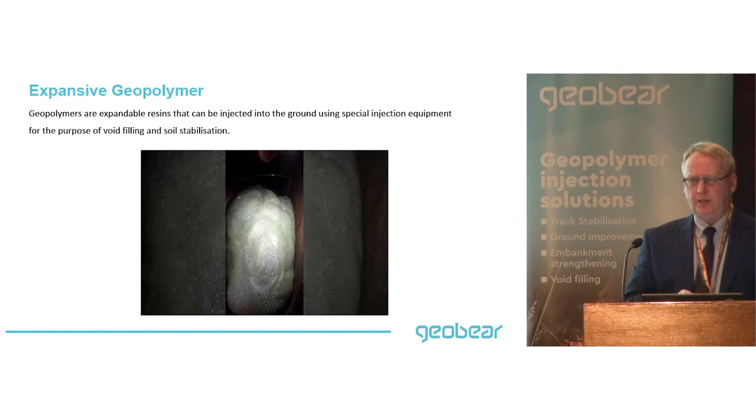So what are expansive geopolymers? They are two-component geopolymers comprising of a resin and a hardener. And when you mix them together, there's a chemical reaction, and that leads to a state change from liquid to solid. And there's a consequential volumetric increase due to that chemical reaction.

There's a short clip here I'm going to show you of us injecting a mixed liquid polymer into a void, and you can see the reaction as it moves forward. So the liquid's going in. After a few seconds, the chemical reaction will start. And it's finished.

So this polymer is a void-filled polymer, and so it's characterised by a fast chemical reaction, and it's low-density, high-volume, expansive geopolymer. We have a range of different polymers which have a different reaction profile, and we select the geopolymer for the problem that we're facing.

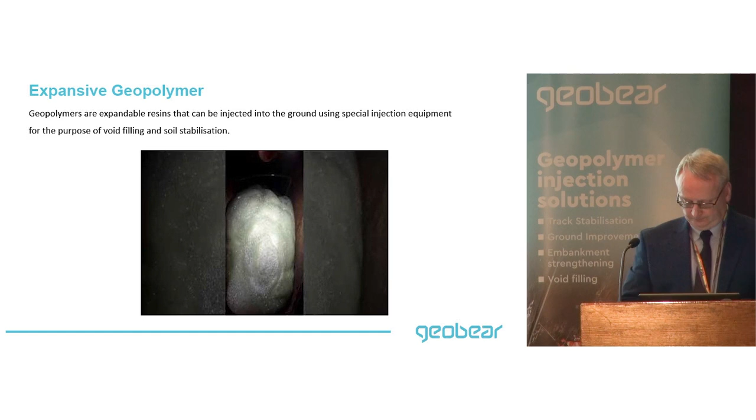We've passed around, there's two polymers here. One is a lightweight void-filled polymer. Another one is a high-strength ground reinforcement polymer. So they're two different polymers, and they've got quite different densities, although they're comprised of essentially the same material.

Now, depending on the geopolymer type, the geopolymers can expand up to 40 times their original volume and generate different lifting pressures. And what you saw in the video clip was a high expansive volume, and that was probably up to 40-fold volume expansion. But the amount that a polymer will actually expand is controlled by the confining pressure at the point at which you inject it. And so there's a relationship between the confining pressure and the amount of expansion you get.

And understanding that relationship is really important if you want to design with geopolymers.

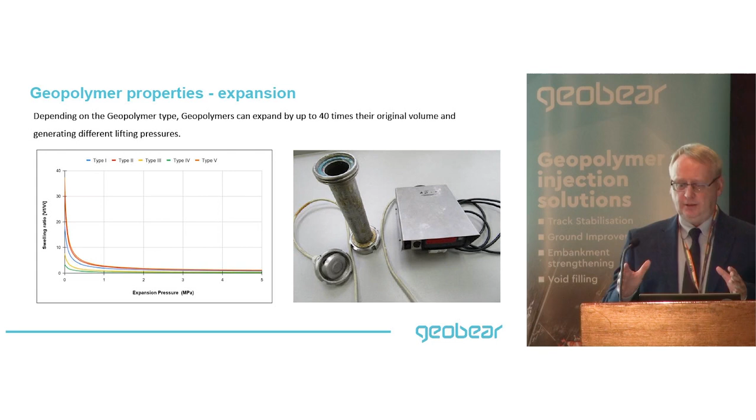So how strong is geopolymer? The strength is a function of the density. So as the density of the polymer increases, the compressive strength and the tensile strength both increase. And the two examples you've got out there, one is a low-density polymer, and one is a high-density polymer. They will both have different compressive strengths as a function of that density. What is also interesting to note is the compressive strength and the tensile strength are fairly similar at the same density, so it's not like a concrete which is strong in compression and weak in tension. These are strong in both directions, if you will.

And we test these material properties in the lab, so we know what the physical properties of the material is for any given density, and you can work out the relationship between density and strength. It's very important. You would expect the stiffness to go up as the density increases, so it's sort of proportional to the compressive strength, but the stiffness modulus increases proportionate with the density.

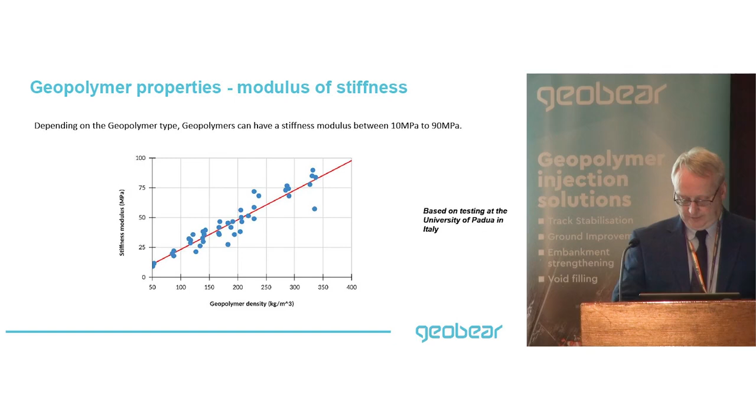So another thing with geopolymers is their ability to resist cyclical damage. The polymers have been tested to see what settlement you get under cyclical loading. And what we've found is that the performance of geopolymers at different densities will generally outperform normal, typical engineered fill, type 1, compacted fill. If you inject geopolymer into those materials, you'll find that their resistance to cyclical damage is greatly increased.

Other key properties: unlike conventional grout, geopolymers have a hardening time typically of less than a minute. You saw the reaction there went from liquid to solid in a matter of seconds. Full strength is normally achieved within 24 hours, and probably 90% of the strength within 1 hour. So they rapidly harden, quite different to conventional grouts.

Cement-based PFA grouts take quite a length of time to get to their compressive strength. So that's an advantage with geopolymers, in that we can do our treatment and get a result very quickly, and that saves time, which is important for completing projects quickly.

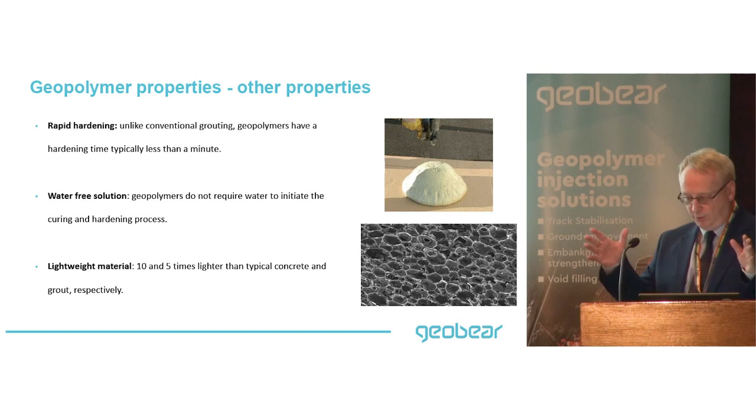The samples being passed around are very light. The actual density is less than 1,000 kilograms per cubic metre, so much less dense than water in most cases. They're lightweight materials due to the cellular structure, because essentially geopolymers are polyurethane-based chemistry. You can see the cylindrical bubbles here; inside them there's trapped carbon dioxide, which leads to expansion when you mix the two chemicals together. So they are lightweight, strong materials, very flexible.

We've had them tested extensively, because it's very important that injecting chemicals into the ground doesn't contaminate groundwater or generate a leachate problem. We've crushed the material into fine sand-sized particles and done leachate testing, and we've not detected any harmful chemicals above laboratory detection limits. So we're very confident they're safe to use over aquifers, and we've never had a problem reported regarding their impact on the environment. They're environmentally friendly products.

The other thing to consider is carbon footprint. Compared to traditional cement-based grouts, we use a lot less material to achieve the same end result, which generally means the carbon footprint of geopolymer-based solutions is lower than conventional solutions. We've had this independently verified by Carbon Footprint Limited, who've done carbon study analysis on our projects comparing our approach against conventional treatment. We're looking at roughly 46% less carbon emitted on typical rail-based infrastructure projects. It varies by project type, but for rail-based solutions it's roughly half the carbon emitted, which is a good positive thing for geopolymers, in my opinion.

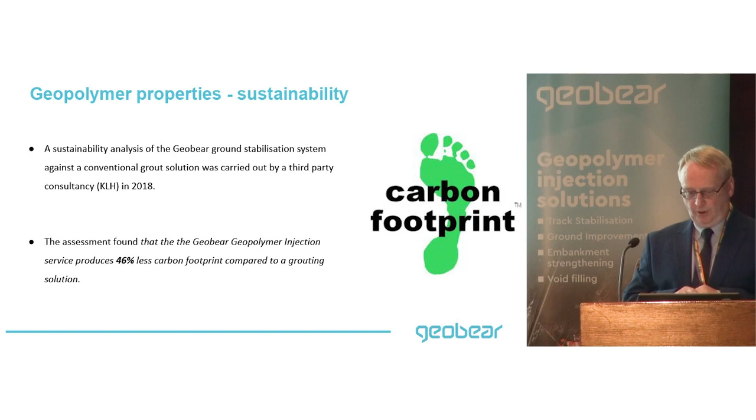So let's look at a few improvement principles.

The way you design with geopolymers depends on soil type: there's granular soil and cohesive soil, so clays and silts versus sands and gravels. The geopolymer behaves differently depending on what soil you've got, so it's important to know whether you're dealing with sands or clays. At the point of injection we drill a small hole, 15 to 16 millimetres, put an injection tube into the ground, and inject the polymer through that tube under pressure.

When you have a granular soil, like a gravel, the initial permeation is through the intergranular pore space, flooding the space between particles; that's called permeation. When dealing with a firm or stiff clay, typically for clay shrinkage solutions with a desiccated fissured clay, the polymer migrates along the fissures and voids rather than through the stiff clay itself, meaning less of what I call hydraulic fracturing.

But with a very soft clay, like we had at the Severn Valley Railway, injecting geopolymer under pressure will hydraulically fracture it. You create fractures, and into those fractures the geopolymer flows, then expands and hardens, reinforcing the clay soil through these fractures.

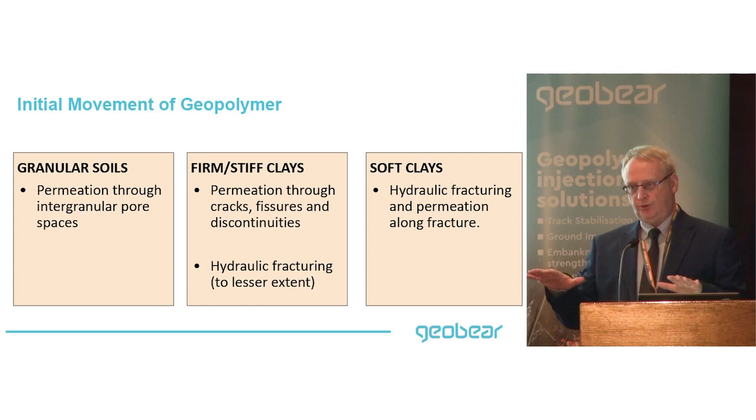That's shown in this picture—these are the vertical and horizontal fractures of geopolymer within a clay matrix. They typically form a cross pattern of interlocking fractures. Consider a very soft clay at maybe 10 to 15 kPa; inside it you put a geopolymer that could be 1,000 kPa in compressive strength. It's rather like putting steel into concrete—it's reinforcing the soil.

We fracture the clay, fill the fractures with the polymer, and because the polymer is very strong, you get a composite effect of strengthening the clay.

Here's some pictures from an excavation we did. This was actually done in stiff clay, and it showed how the polymer migrated along an open fracture. We dug it out of the ground, and it looks like this - an actual slab of polymer that's the same shape as the fracture it migrated along.

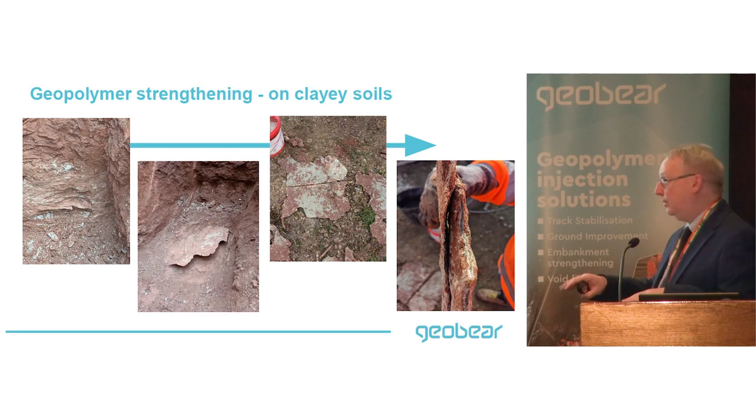So that's some fractures. Let me talk about equilibrium pressure, the science lesson bit. Key thing to know about polymers is the way they expand under pressure - the swelling pressure increases as the volumetric expansion gets smaller. So when you have a very large expanded volume, the pressure is very low, and conversely, when you have a small volume there's high pressure. This is the expansion phase of the geopolymer, represented in blue on this picture.

At atmospheric pressure, the polymer has its maximum volume, which is called free rise density. So if you were to inject the geopolymer on the ground here, it would expand. The only thing stopping expansion is the weight of the atmosphere on top of that polymer. That's the expansion of the actual geopolymer's free rise density. This is a key thing to know.

Now, when you inject in the soil it's working against that expansion force, represented by the red arrows. So you have a battle between the expanding polymer and the confining soil - two basic forces opposing each other. The point at which the polymer will stop expanding and harden is here, where the expansive force of the polymer is matched by the confining pressure of the soil.

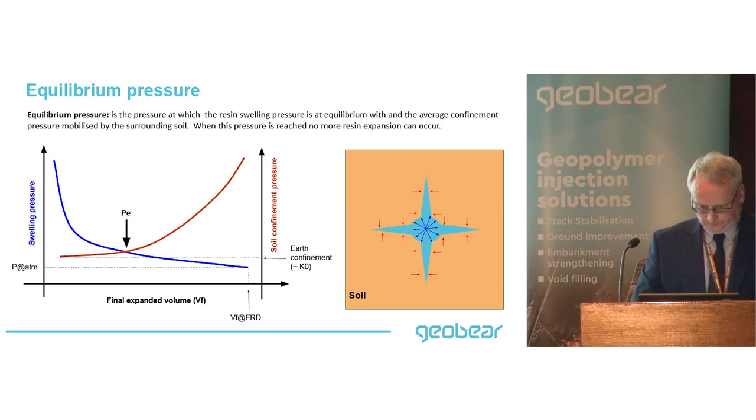Now, if I talk briefly about loose granular soil, here's an example of permeation. This was done down in the south of England, at a place called Hurst Castle. We did a trial on the beach where we excavated a trench full of beach shingle, loose gravel, and injected into that gravel to see what would happen. The polymer forms things we call bulbs - a big lump of gravel and polymer mixed together, because the polymer is in between the gravel, a bit like concrete. When you cut this stuff open, you can see polymer and gravel all mixed together. You get these large bulbs forming, and the size of the bulb is proportionate to how much you put in and the depth at which you inject it.

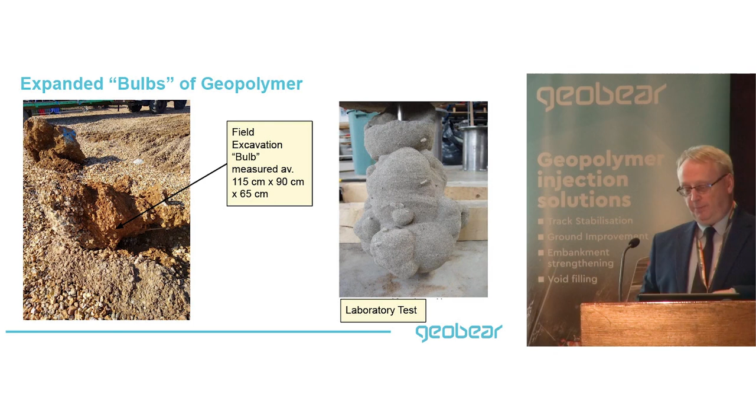Here's a smaller lab bulb done in one of these test cylinders using sand, a finer grain material, but essentially the same thing is happening. The polymer permeates through the pore space and then expands and forms this bulb, and it's that expansion that causes compaction. So in granular soil, we increase bearing capacity through compaction, not by creating fractures - quite different.

So the densification of the soil can be estimated from the volumetric expansion of these bulbs. If we can predict how big the bulb is going to be for the amount of kilos you're going to put in, we can work out how much the density of the soil is going to increase. That means how much the angle of friction is going to increase, and then how much the bearing capacity is going to increase. We have modelling tools that will calculate that improvement.

Final example, this is from a project in Glasgow. The red line here is in loose sand - you can see from 10 SPT down to about 5, so pretty loose sand. We injected at about 3 or 4 levels and did a post-treatment SPT test, measured in the blue line. We got a consistent improvement, which is very close to our model prediction for granular soil.

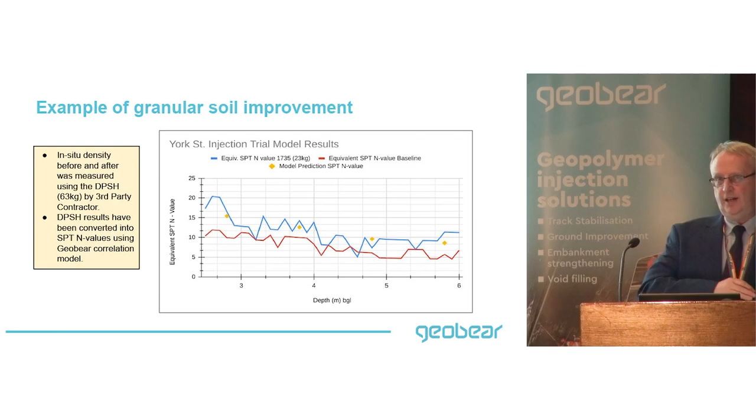So that's explaining to you how it works in clays and how it works in granular material. The next bit is to actually talk about the SVR trial, but I thought it was important to give you a bit of an understanding of how this might work in the soil, because what's happening in the soil is very important.

So as was mentioned, last year we were asked by Severn Valley Railway to assist them in stabilising a section of an embankment that had some problems - some slope stability problems, in fact long-standing issues on this particular slope. It's in a place called Alveley Wood in Shropshire, right next to the Severn Valley, and this is a heritage railway, as you probably know.

You can see from the picture the track was showing signs of distress, which resulted in a 300mm deviation from the design geometry. That meant they had to put a severe speed restriction on the line, 10 miles per hour. The amount of deformation was about an 80-metre section parallel to the River Severn that was showing instability, and so we were asked to look at this to help them stabilise parts of it using our technology.

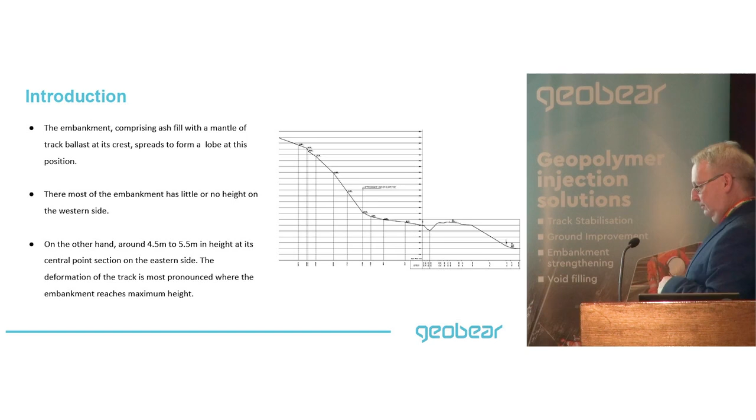So this embankment is not very big. You'd think why would such a small embankment have a problem? Because it's not a very high embankment - we're talking 4 to 5 metres maximum height. Other parts it's only a metre or so, not a very big embankment. But nonetheless, it's shown historic movement. The reason becomes clear when you drill boreholes into it.

Let's look at the track tilt sensors. Here's some tilt information on the actual track itself - these are the sensors.

We chose this location for the trial because we had some good data - we got some tilt data beforehand, so we can see what improvement we got afterwards. There was data available in 3 sections. They had some data, and the section that we chose to treat was 17684, which is shown by the red line. That's the tilt information for the section we were asked to trial, essentially the worst part of the embankment.

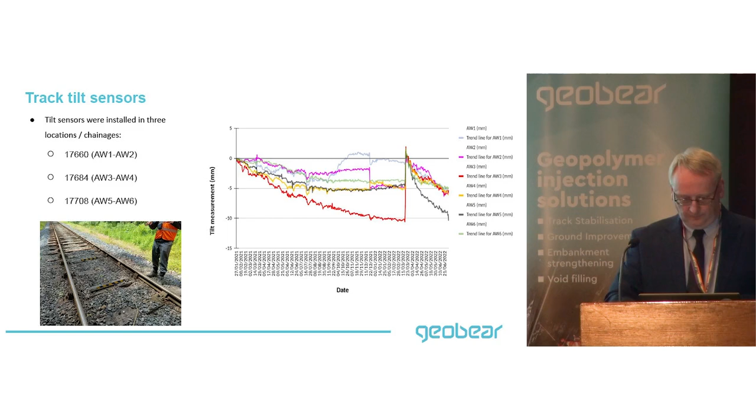This was interpreted by the ground investigation contractor as probably the result of an ancient landslide. This landslide probably occurred at the end of the last ice age, and so it generated a shear plane inside the top of the weathered mudstone, at a depth. This shear zone is about 4 or 5 metres below ground level.

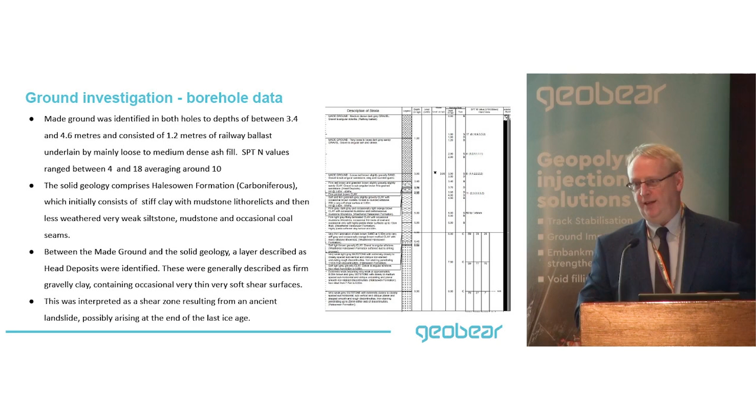Now, obviously, when they built the railway, they didn't know there was a shear zone there. This had obviously been there for thousands of years, and so they stuck the embankment on top of the shear zone, and then built the railway on top.

So when GIP did some slope stability analysis of this embankment, it was shown that the minimum factor of safety occurred when you have a shear surface through that shear zone. So essentially, all of this hill is sliding into the river along that weakened shear plane. We have a plane of very weak clay or soft clay, and the weight of the embankment is such that it's just slowly sliding down into the river. This is essentially the analysis that GIP did, which was indicating what the problem was. So it was a slope stability problem.

And in order to make the slope model work, you have to assume that the shear zone is at what we call residual shear strength. I mean, very, very low shear strength, no effective cohesion, low angle of friction.

Now, the original proposal was to soil nail through the shear zone into Halesowen bedrock. So the idea was to drive soil nails through this direction into the Halesowen rock to try and reinforce across the shear zone. So that was the basic original solution. And so it was Geobear's task to think, well, what else could you do with this sort of problem? I'll lead that onto the design. I'm going to hand over to Mohammed, who will take you through the design side of it.

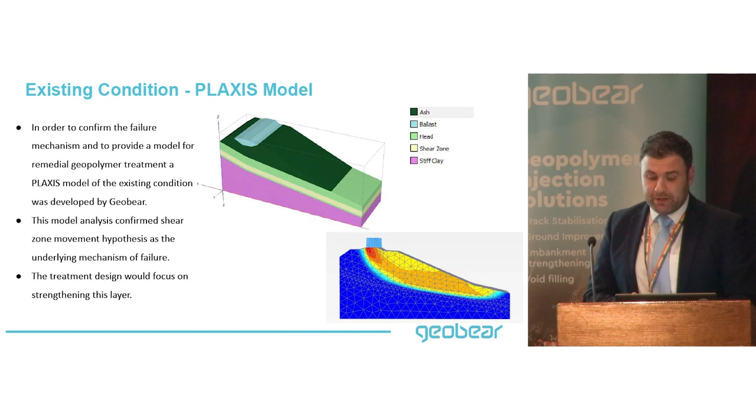Based on the analysis we carried out, we estimated that the factor of safety is somewhere between 0.8 to 0.9. We verified the geotechnical parameters that we had for the model, that we inputted into the model. And then we studied what amount of cohesion, or extra strength, we need to add to the embankment to get it to some level of stability. We estimated that we need to improve the cohesion of the shear zone from 0 all the way to 10 kPa. That was the main design parameter for us, the ultimate design parameter.

So in order for us to do that, we estimated that if we manage to improve the shear strength, the undrained shear strength of the plastic clay or the shear zone, to 100 kPa, we will be able to achieve that increase in cohesion of 10 kPa. So that's the design philosophy that we followed.

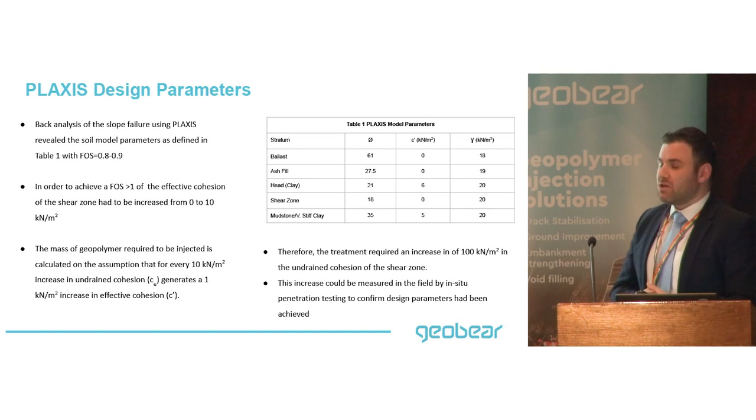So, based on all this analysis information, we carried out a detailed design, and we came up with this design. Some of you have attended the trials and seen this going into the ground live.

So what we've done, we've treated out of that 80-meter distressed section of the embankment, we've selected 10 meters within that, and basically installed the injections at every alternative sleeper bay, spaced roughly about a meter apart from each other. We extended the treatment outward, away from the track, towards the river.

We carried out the injections at different levels. Under the track, we treated basically the ash, and as we stepped away, we increased the injection intensity. We used a high density geopolymer to treat the shear surface and inject through it, with different materials and different injection dosages.

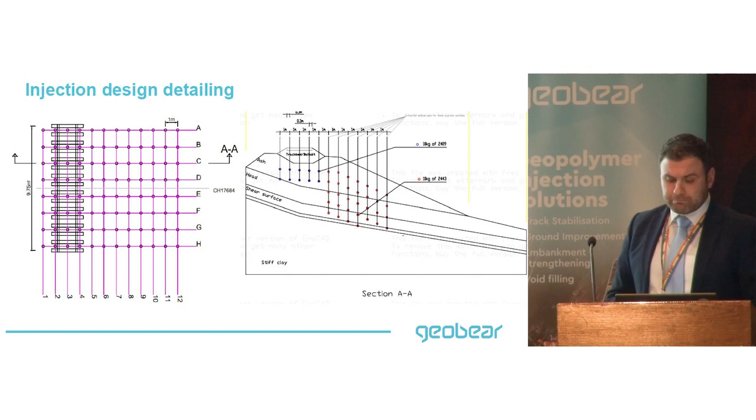We developed the design, and last year on the 25th and 26th of July, we carried out the installation using our mobile injection unit. Our mobile injection unit is mounted on a wagon connected to an engineering train, and it has all the equipment in-house within the unit.

Everything we need is within that unit, and the injection hoses are extended from the unit to the injection area. Our hoses can extend almost up to 120 meters away, so the injection unit can sit 120 meters away and the hoses just come up and inject.

You can see here the injection tubes already installed. These are 12 millimeter diameter tubes, installed to the design depth, and we go to every single tube, connect the injection gun, and start the injection.

We've installed approximately 136 injection tubes, and we've pumped roughly about 2.5 tons of material within that section.

During the injections, we monitored track heave, so we had laser level monitoring at different locations, monitoring if there were any movements being experienced on the track.

Following the completion of the injections, we carried out dynamic probing. Before we started, we did dynamic probing, and after we finished we also carried out dynamic probing, just to have a comparison of what happened instantly between before and after the injections.

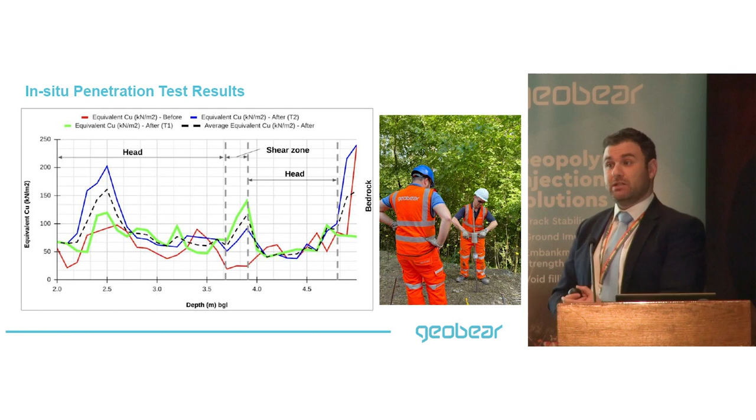Based on the information we obtained from the shear strength, we said, okay, we need to verify whether our initial assumptions with the modeling are correct or not. So we took all that data from the probing and plugged it into the model, using some of our in-house design models that quantify the improvements that Andy kindly described earlier, and we quantified what sort of level of improvement each material or each layer would exhibit.

So what happened to the ash, what happened to the head, and what happened to the shear zone. These are the highlighted parameters, the ones that actually been affected by the improvement, and that was quantified from the probing data. So we've taken that and carried out the analysis.

Based on the analysis, we've estimated that if this works, it should improve the factor of safety, pushing it from 0.8 all the way to around 1.2. So a significant improvement in the model and the factor of safety. Now remember, we were not working to a very rigid specification, we were not given a specific target, but this was done as a trial to understand if this technology is capable of improving the factor of safety and the long-term stability.

So the modeling backs up the theory that this should improve the overall stability. So what we've done, we've examined the data from the tilt sensors, and we focused on the middle part. Obviously, this is where we've done the treatment, so we focused on that.

We looked at 2 years worth of data, and looked at what happened in the last 6 months, but we also had to look at what happened before, because we needed a comparison, and we needed to make sure the comparison happens in a way that they're comparable, where the weather is roughly the same. We don't want to compare summer measurements with winter measurements, because that doesn't make sense, since water is a big factor in all of this. So we needed to make sure our comparisons are happening within similar seasons, and they're not very different.

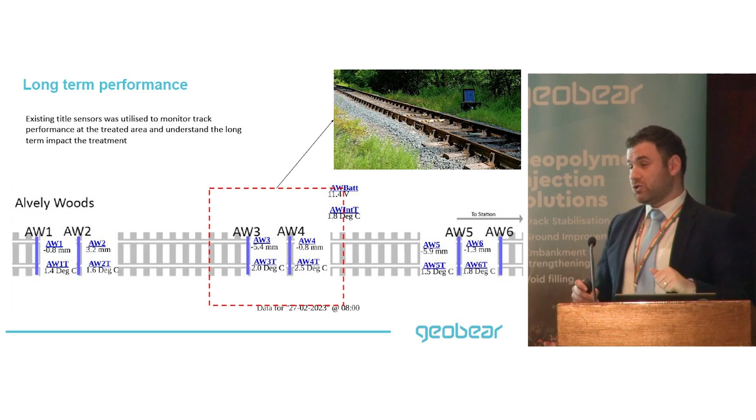So we've taken all that data and pre-processed it, and we also made sure we normalized the data for the starting tilt values, because it doesn't make sense to compare data with different starting tilt values on the track. The behavior would be completely different, so we had to normalize for that.

Based on this, we managed to generate these graphs from the processed data, and what it shows is that before the treatment, the rate of deterioration was around 1.75 millimeter a month. So every month we were losing that much, a movement or tilt movement by that amount. Following the treatment, we estimate this has gone down from 1.75 to around 0.4 millimeter a month.

And this was using 2.5 tons of material, which gave us this level of degradation. If we were to go with a full-blown design, we would have gone for 5 tons of material, and we actually modeled what would have happened. If we'd done that, we would have managed to reduce it to around 0.2 millimeter a month. So it's really dependent on what the client requirement is and what degradation levels you're after. We can probably come up with a design that would provide that target.

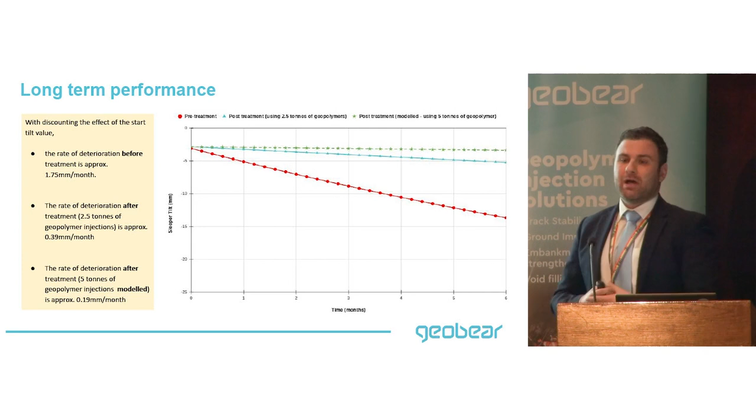So that's all good and interesting, but we also had another set of data to look at, not just the tilt sensors. Tilt sensors are installed on the track, and they're great to see how the track is behaving, but they're also affected by the track skeleton response, how the track is anchored to the ground, so there's an element of that data that will be affected by the anchorage of the actual track skeleton.

We looked at the inclinometer data. There was an inclinometer installed roughly 2-3 meters away from the actual treatment zone, just a few meters away, and we looked at that data to see if there's any observation we can make. The inclinometer sensors were installed right in the middle of the track, and if it moves one way, it's positive; if it moves the other way, it's negative.

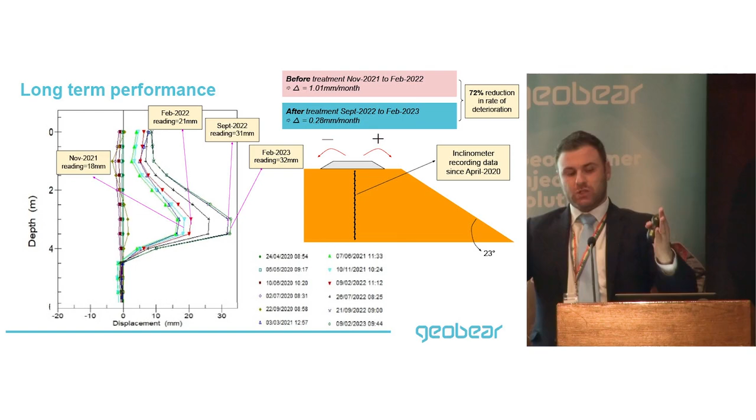They had different measurements roughly every 6 months, taking a set of readings at different depths. So if we just take a snapshot of the data and try to compare similar periods - remember, we did the work in July, around end of July - I picked a period between September and February to give the track time to settle and lock in position, then monitor it from September to February and see what happens.

So before the treatment, in November 2021, the inclinometer reading was about 18 millimeters. In February the following year, 2022, the inclinometer reading was about 21 millimeters.

That will give you a rate of deterioration of about 1 millimeter a month, roughly, if you take the delta between the two measurements and normalize them by the number of months. This is really quantified by this gap - how much movement has been exhibited between those two periods, in terms of how the core of the embankment has actually moved sideways towards the river. That's what this gap represents.

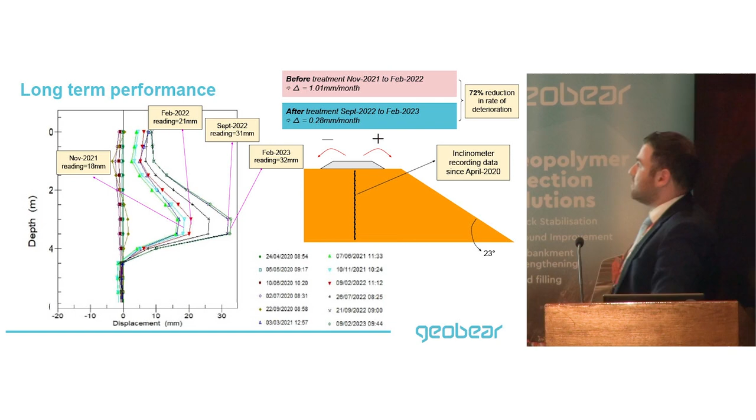Now let's do the same analysis, the same approach, after the treatment. Pick similar periods and do the analysis. If we look at September 2022, that was after the treatment - we've done the treatment somewhere in July, between those two dates. Picking September, because that's the most recent date we can use, the reading was 31 millimeters, and the following February was 32 millimeters. You can see this is the amount of movement exhibited within the core after the treatment - that gap. If you take the delta of that, it gives you around 0.3 millimeter a month of movement.

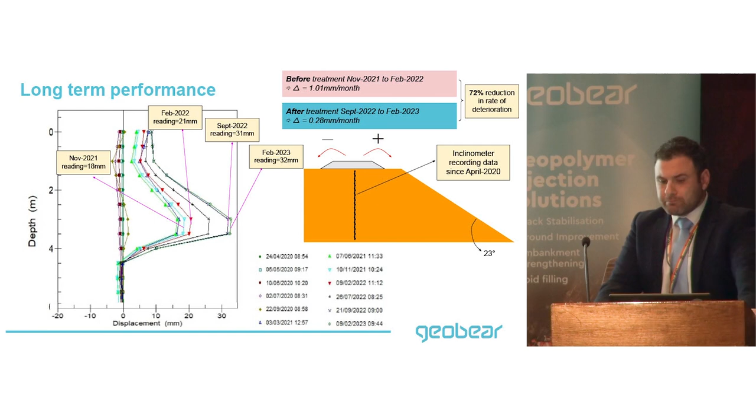Which translates to roughly 72% reduction in the rate of deterioration. And we were getting a similar percentage reduction in the tilt sensor, so that's basically making sense. It's matching up nicely with what you're seeing on the tilt data with the inclinometer data.

Now, one can argue, well, you've compared two periods, but maybe you had a drier season or a drier winter last year than this year - how do we know this improvement is actually due to the injections, not due to the weather pattern changing? Well, I've compared the rainfall data in those two periods in the same location. Before the treatment, between September 2021 and February 2022, the total cumulative rainfall within that period was around 342 millimeters.

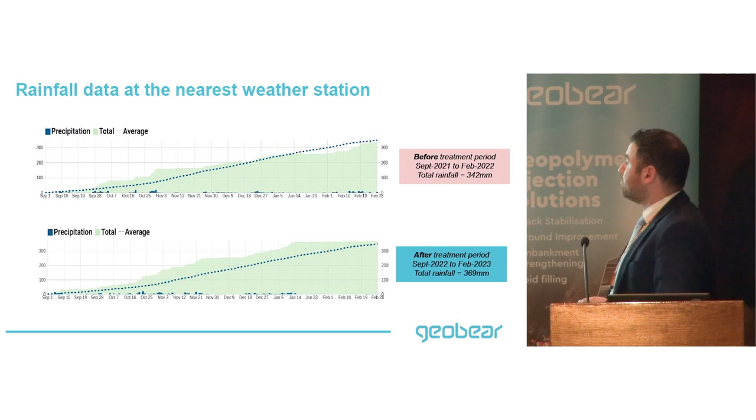And after the treatment, I've taken exactly the same period and compared the total cumulative rainfall, and it was actually higher - slightly rainier after the treatment. So that tells me water was not really a factor in why we were seeing this improvement. It wasn't because it was drier - actually it was slightly wetter than anything.

So what are our findings? The trial has demonstrated that geopolymer injections can be used to stabilize or reduce the rate of deterioration of slopes. Obviously, to what design specification or level you want to target is another discussion - we can design to different targets depending on what the client wants. Also, modeling was key in understanding the overall mechanism and developing the treatment.

The last thing we want to do is just come in and start injecting geopolymer randomly everywhere. As demonstrated nicely by Andy, it's key to understand what material you're dealing with and what's the most optimum way of dealing with that material.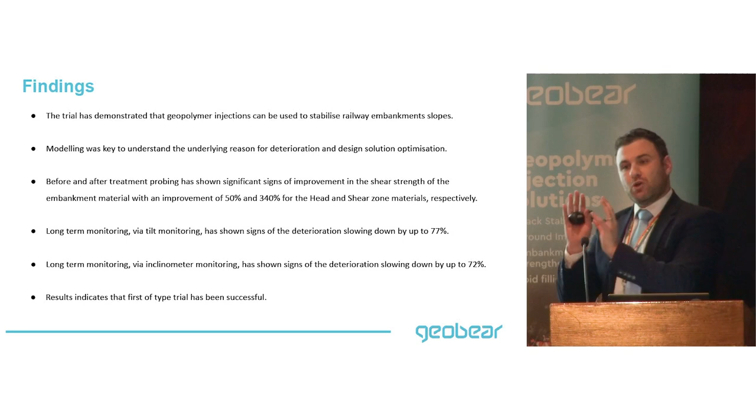Before and after probing has shown that we've managed to improve the shear strength of the weathered clay by about 50% and the shear zone by about 340%. We've seen that from the graphs. Long-term monitoring via the tilt sensors has shown that we've reduced or slowed down the deterioration by about 77%, and we've seen similar values on the inclinometer monitoring data, where we showed we've reduced the degradation by about 72%. So from our perspective, this has demonstrated that the treatment has actually worked.

It did what it's supposed to be doing. Obviously we're not saying the ultimate aim was to entirely stop the movement and kill it off altogether. What we wanted to demonstrate is that if you put geopolymer in and try to understand what's going on, are you able to reduce the degradation or not? And I think the answer is yes, we can - that's what this data has actually shown us.

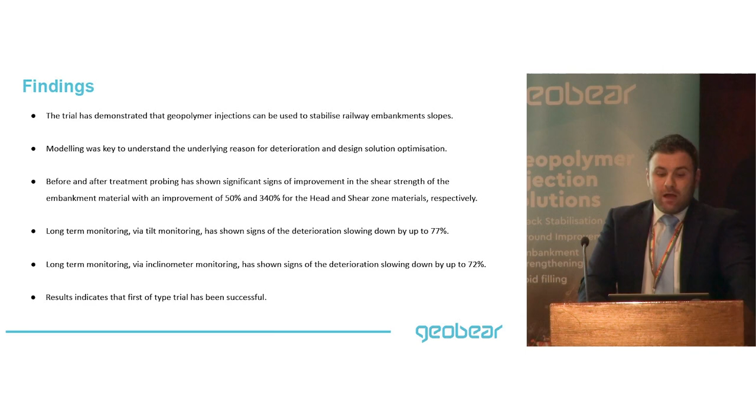Now I'm just going to show a quick video to give you a recap, a nice summary of what we've done on site, for the people who haven't attended. I know some of you have actually attended the site works - I met some of you, which is brilliant. But hopefully this video should give you more insight into what happened.

So we're here today on the Severn Valley Railway. As the name suggests, the railway runs along the Severn Valley. Now, for the last 150 years since the railway was built, the water, when it rains, runs down the hill towards the river, as you'd expect.

About 6 metres down, there's what's called a slip plane. The water causes two surfaces to slide over each other. If you imagine two sheets of A4 paper, you can push them across each other, and that's been going on for the last 150 years. So for the last 150 years, civil engineers from time to time have had to take remedial action to fix the track, which is slowly sliding into the River Severn.

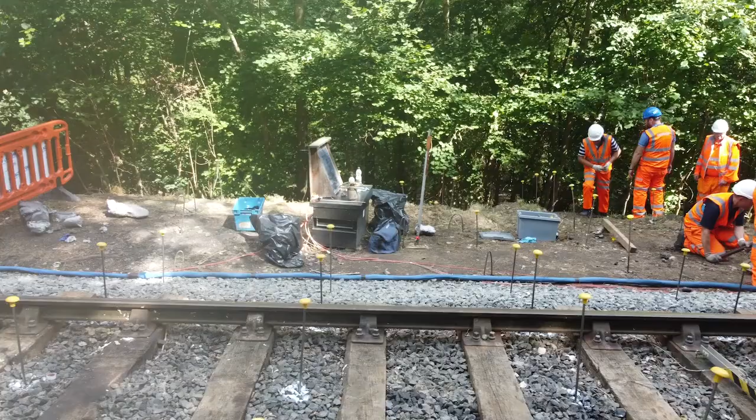What we've been doing today is using geopolymers to fix the problem once and for all. If you imagine these two sheets of paper sliding over each other, what we're effectively doing is applying staples between the sheets of paper. We are injecting geopolymer into the slip plane, fixing it and stopping it sliding.

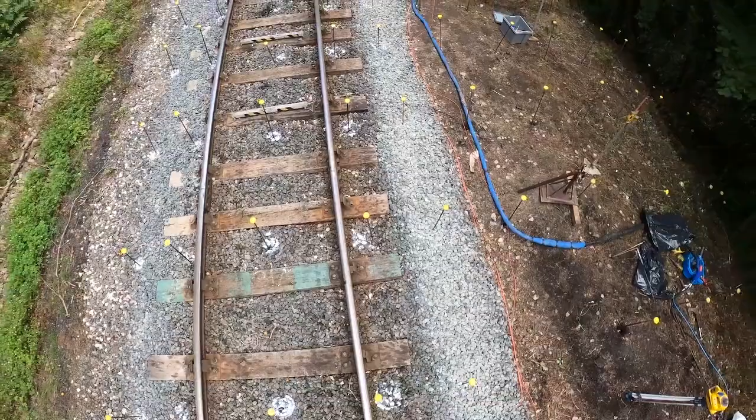The track already has some settlement sensors, or tilt sensors. These sensors measure the level of tilt that the track experiences on a daily basis. They've been installed for almost 2 years, recording data since then, and from that data we've learned the track has been losing tilt by approximately 9 mil every year. Following the injections, we're hoping to monitor these sensors and see if there's a change in the degradation level as a result of the injection.

We've also done some ground probing to see the before and after results of the injections, which showed significant improvement, and that's already been done. We tested our treatment in a virtual software environment to give us an outcome and see if the treatment would work. After getting good results and optimizing the design, we finalized the design and, as you can see here, installed it into the ground.

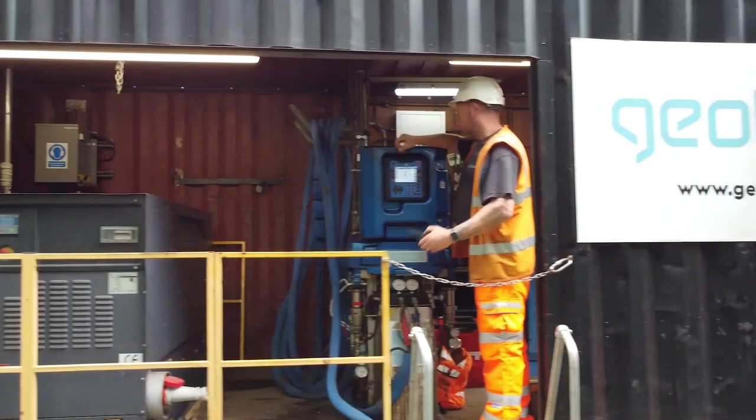One of the real challenges with injecting geopolymers, and there are lots of companies out there that can inject geopolymers, is understanding what the engineering problem is, and particularly what the engineering design solution is. Because if you get it wrong, we could have built a dam here, and the water coming down off the hill hits that geopolymer dam. Guess what? That railway is going into that river even faster than it's ever gone in before. So the design is really, really crucial.

You'll notice, if you can see behind me, from where the injection tubes are, the spacing is really important, the depth is really important. What we want to do is stiffen the embankment, stop it from moving, but leave sufficient path for the water to continue to flow down to the river.

This solution works really well in short intervals. If you only had 6 hours of track access, you can put the probes in, put the geopolymer in, clear everything up and be off site very quickly. So you can work in short duration possessions every midweek night, fixing the problem so you don't disrupt the passenger service, and that's really important about this solution. We can do it in short intervals, no passenger disruption, and when we've finished, you get a much better track and a much better passenger service.

Okay, so I think we've finished the first two parts of the presentation where we've introduced the material and the improvement, in terms of how it works. But obviously, slope stabilization is not the only type of work that we do. We decided to take this opportunity to also show you other applications we do on the railways. We thought the best way to do this is to take you through very short case studies, just to give you a flavor of what other things geopolymer injection can be used for to treat railway assets in general.

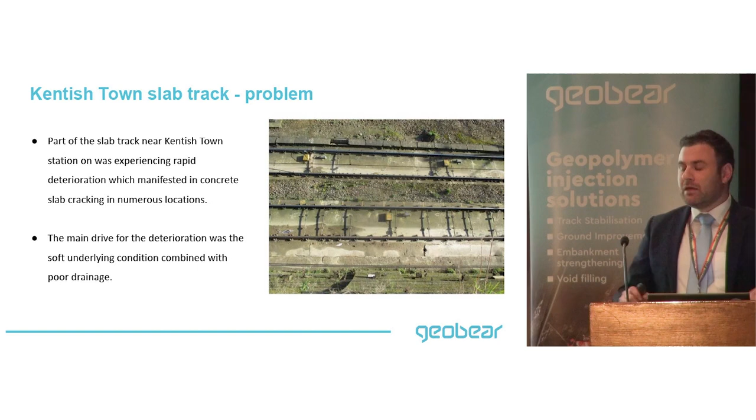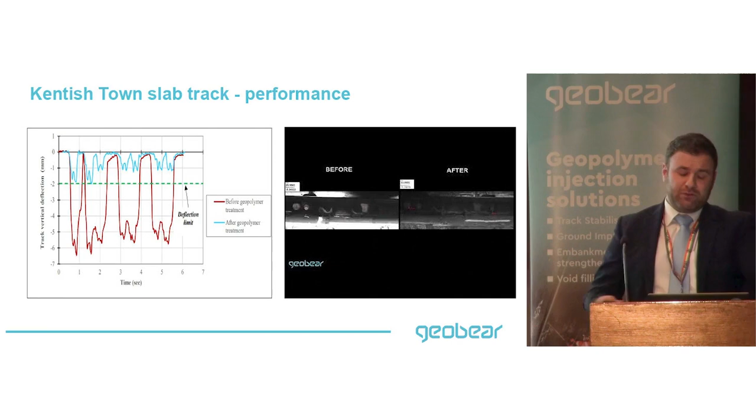So what we've done, we carried out our injections every 1.5 meter centers, carried out almost double injections on both sides next to the rail seating area, and injected our geopolymer at 1.5 meter depth to strengthen the ground underneath. The client carried out deflection monitoring, or stiffness monitoring, using high-speed cameras to monitor the track deflection before and after the injection. Before the injections, the track deflection was reaching around 6.5 mil. Following the injections, that was reduced to about just shy of 2 mil, which puts it in the ideal range of track deflection for a normal, operational slab track.

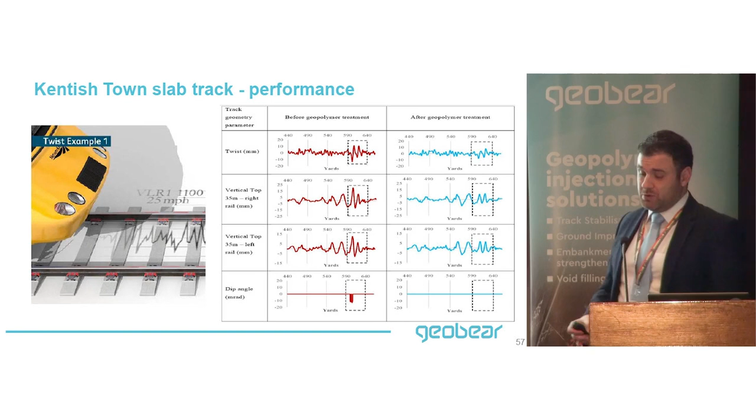We also looked at track geometry data. So in terms of what happened, we looked at dynamic deflection as the train passes, but also track geometry data captured by the recording coach. The red graph shows the different track geometry data at different channels, so twist faults, vertical tops, and dip angles. Track engineers probably understand what I'm talking about, but these are different measures of track quality data. This was all before the treatment, so all the red curves are before treatment, and the dashed area is where we implemented the design solution. You can see where there was quite bad response, even dip angles showing up. Following the treatment, and the following run, this was the resulting track geometry. We managed to strengthen the ground, but also almost lift it back to the right position. You can see a significant improvement in the track geometry response after treatment, to the point where we even eliminated the presence of dip angles. But that was part of a temporary solution, it wasn't on a permanent basis.

Another example of new types of work we've been working on is filling animal burrows. As some of you may know, embankments, especially if made of granular material, tend to be more susceptible to animal burrows. Rabbits and badgers are able to burrow through the embankment. If it becomes excessive, it can start undermining the integrity of the embankment, and you start getting excessive settlements, which will impact the track.

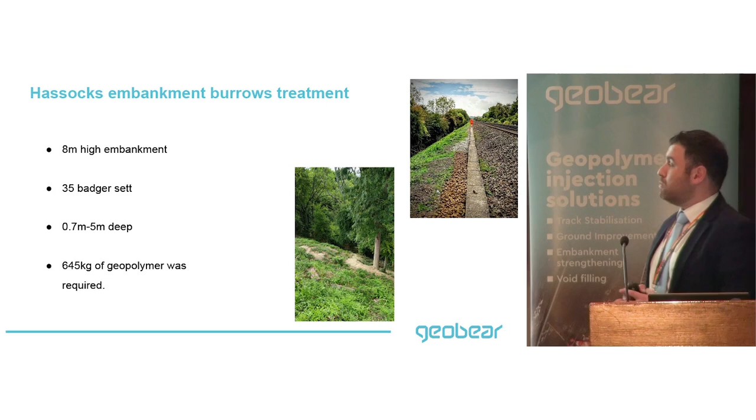This example is from Hassocks, where there was an 8-meter high embankment with 35 badger setts, and the sets had a depth somewhere between 0.7 to 5 meters deep, so some of them quite deep. I've seen similar stuff on other railways, and we were required to install 645 kilos of geopolymer to fill those 35 sets.

We used our mobile injection unit, and simply inserted our injection tubes into the badger sets, after they were removed safely and taken care of, spoiled and fed and all that. So we didn't kill any badgers in the process - that's a disclaimer. That's the sort of approach.

But also, to make sure we're filling the badger sets efficiently, we also used CCTV cameras to monitor how the polymer is spreading through the badger sets, and how it's forming up inside. It's very important to understand the dimensions of your badger sets and the spread of those sets, because that will impact what sort of polymer we use.

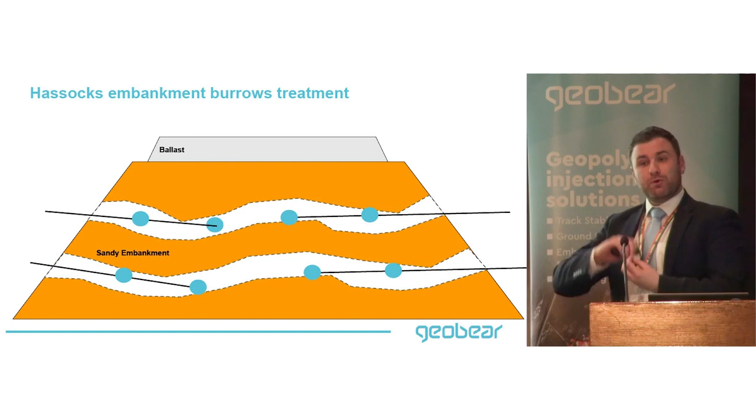So the type of polymer is crucial, because depending on what set you may want to use something with a very long cream time, or something with a very short cream time that goes off very quickly, or something that takes a bit of time. It depends on the type, and that is normally thrashed out during the design process.

So what we've done, we basically used our mobile injection unit, and these are our injection hoses going down to the bottom of the embankment base where the badger sets were located, and we started the injections.

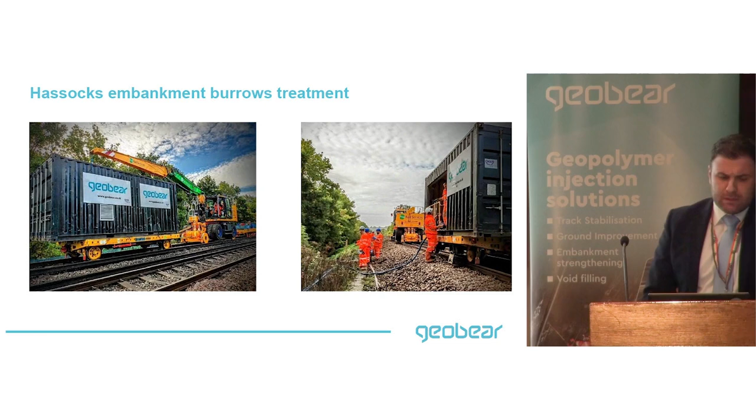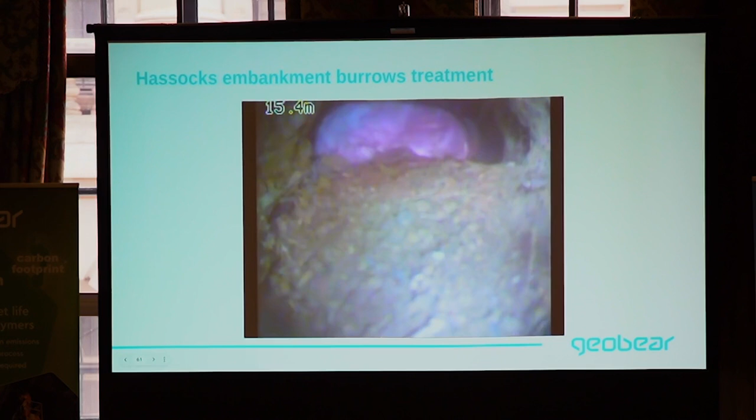I've got a nice clip, one of my favorite clips, of the geopolymer spreading into a badger set, recorded on a CCTV camera. As you can see, the polymer is slowly being injected and expanding within the badger set, and as it's getting closer to the camera, the operator is pulling it back slowly to see what's going on. You can see the polymer spreading within the badger set and expanding to fill it up nicely. That was a good validation to see what is really going on inside the badger set during the injections.

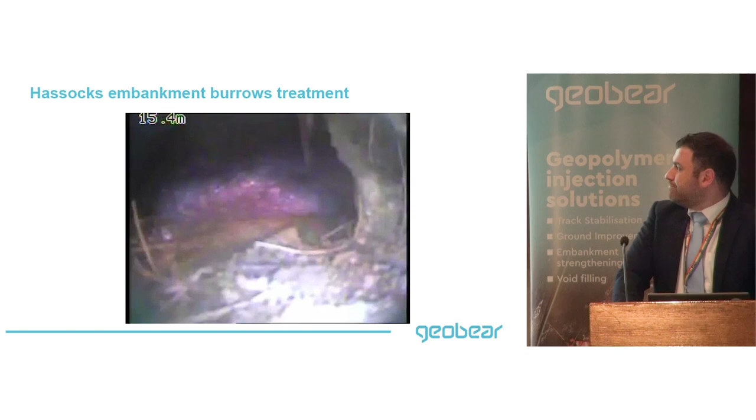Another example is from a level crossing located in the northern eastern part of the country. It's a reinforced concrete level crossing which has been suffering from significant rapid deterioration in track geometry, mainly due to the presence of the usual suspect: soft underlying conditions and poor drainage.

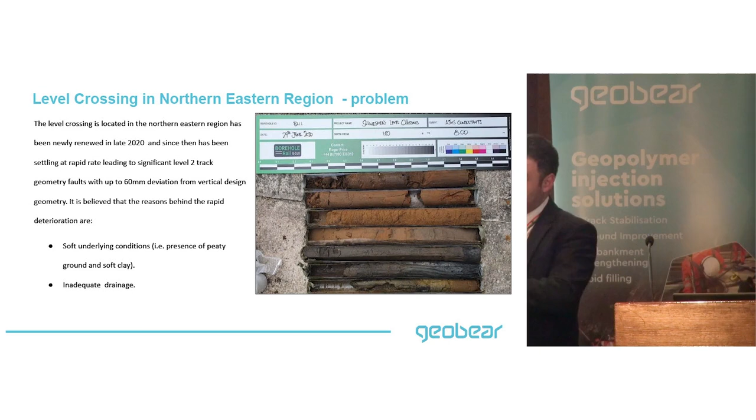As a result of that, they ended up with a level 2 track fault, with about 60 mil deviation from the design track geometry, as a result of ongoing settlement.

Level crossings are quite notorious as a deterioration hotspot, because you've got two types of traffic: train traffic and vehicle or road traffic. Both of those apply a massive amount of cyclic loading into the formation, affecting it, and you end up with a lot of settlement as a result.

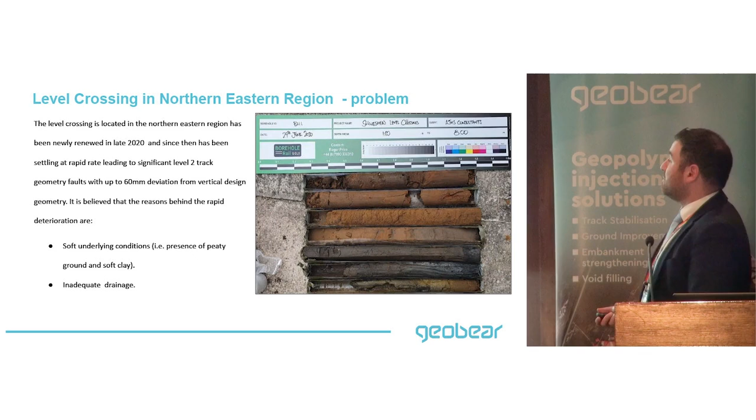So we were called as part of emergency works just to lift the slab. We were not required to strengthen the formation, only to lift it to the right tolerance, the right level. The tolerance we had to work with was between 0 and -10 mil, in accordance with 2102 standards.

What we've done is basically carried out the injections 50 mil into the subbase. We drilled through the slab at multiple locations, went 50 mil within the subbase, and injected the geopolymer.

During the process, we had a number of laser level targets on the level crossing to monitor how the lifting was taking place, but we also had a third-party surveying team looking at the absolute track geometry, what is happening to the track geometry center line and each rail, to avoid any sort of twist faults.

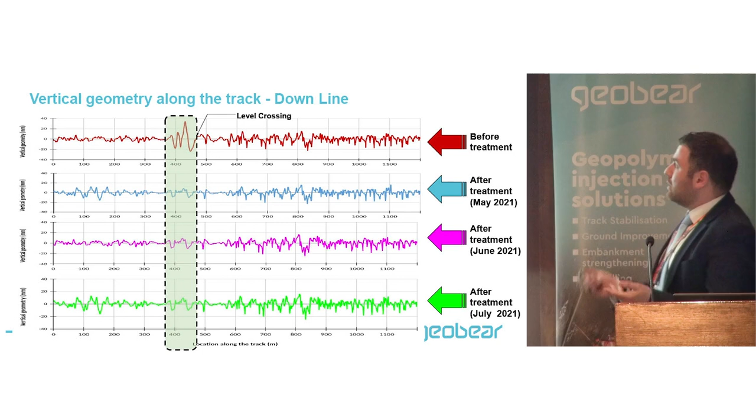After we finished the work, we compared and started monitoring the track quality performance run after the treatment. The red curve represents the track geometry response before the treatment, and the green highlighted area is the area of the level crossing. You can see a significant response bump as you go through the level crossing.

That's before the treatment. After the treatment, run after run, you can see that right after we finished the treatment, we managed to almost level it back and almost eliminate the harsh track geometry response.

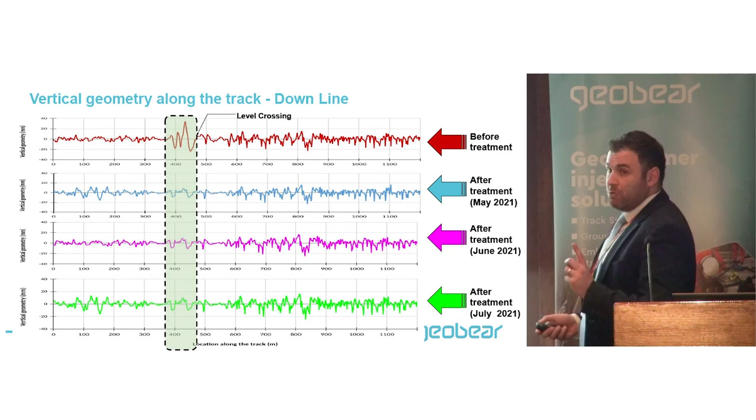We kept monitoring it run after run for almost a period of a year. What we've done is basically looked at the biggest peak-to-peak value over run after run, on both upline and downline. We compared those two, and we were seeing similar observations. This is what we found.

Before the treatment, when they first installed the level crossing, the peak-to-peak value was about 8 mil, and then it grew all the way to about 34 mil, a massive deterioration.

We came and intervened around April, May time, 2021. This is where we intervened: we put the track geometry back on both upline and downline to almost new levels, the same level as when it was brand new, and then kept monitoring that data for almost a period of a year.

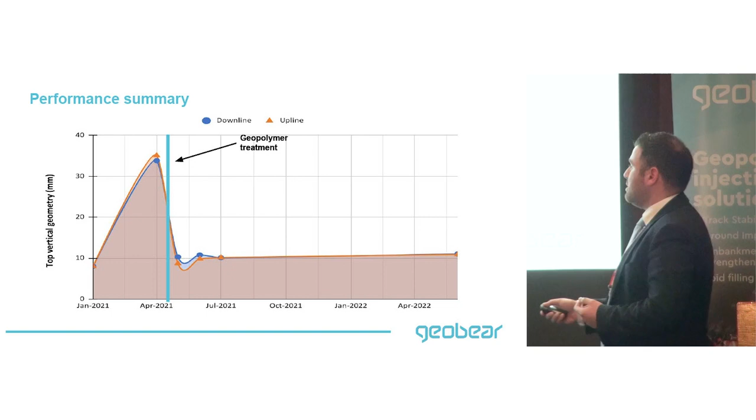We've taken three measurements after the treatment, and then looked at the measurement almost a year after to see what happened. What we've realized is that it seems to have actually stabilized. So we didn't just lift the slab, we've actually managed to stabilize the deterioration.

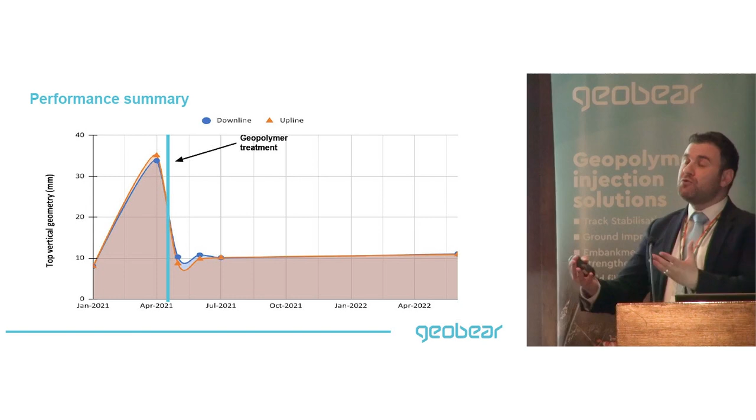This is because when we injected geopolymer in the subbase, we basically strengthened the subbase, compacted it, and created a better platform, which in turn improved the load spreading on the soft soil, reducing long-term deterioration. We estimate we managed to improve track quality and reduce rate of deterioration by around 70% on average on both up and down line.

What you've seen on the Severn Valley Railway was the first time we applied this type of technology in Britain, where we stabilize embankments using this approach. But we've also done similar work in Poland. Our guys there have done work on a railway track, a single line, located in the central part of Poland.

They were experiencing significant settlement due to soft underlying conditions, but also had animal burrowing, so they had two issues. They didn't fully understand the extent of the animal burrowing, so they couldn't simply insert injection tubes and fill everything. As a result, they ended up with loss of geometry, loss of shoulder, high track deflection, voiding, and localized sinkholes appearing within the track structure.

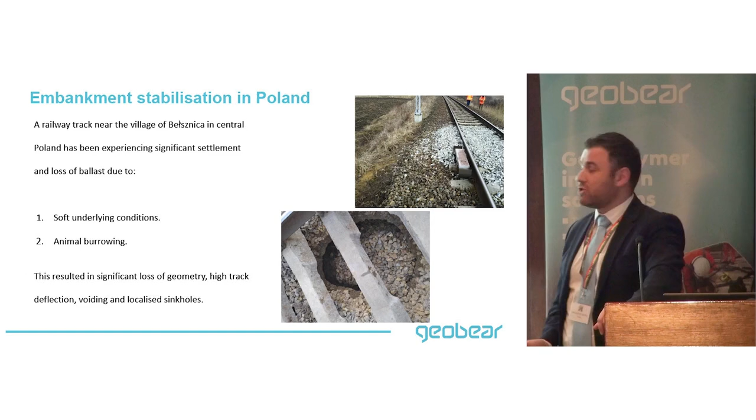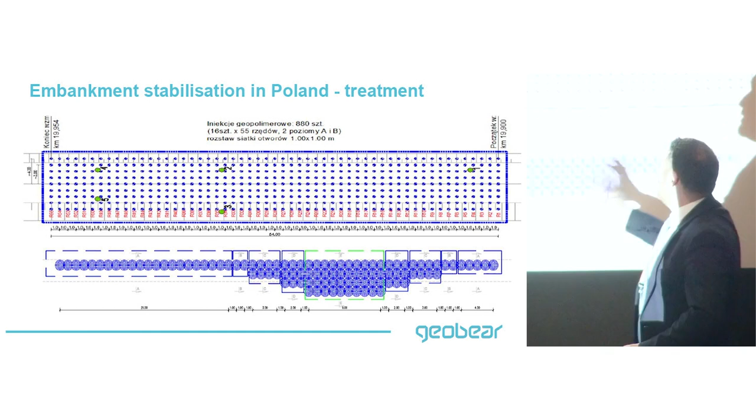We carried out an extensive injection scheme on this one, treating about 50 meters of track, injecting at different levels depending on location. We even created a transition zone into and out of the treatment area - the green dashed area shows where the main problems were occurring - just to make sure we don't create any track quality faults.

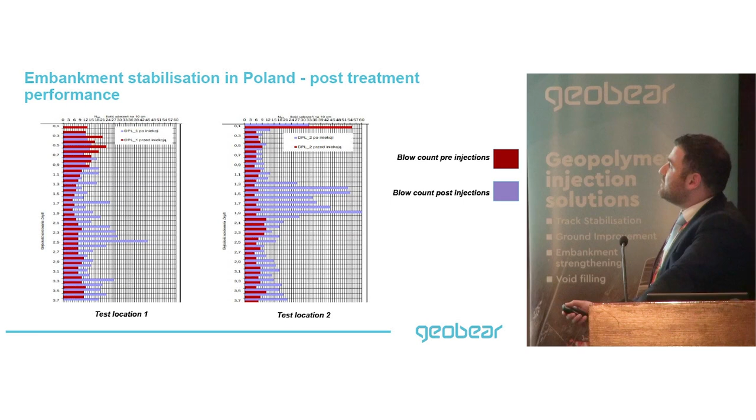We injected almost 880 injections, quite a lot, and the client carried out dynamic probing before and after in two different locations. The red bars represent the number of blow counts before injection, and the blue bars represent blow counts after, at location 1 and location 2. There's a substantial increase before and after injections - in some instances almost up to 6 times. You can see a general great improvement within the treatment area, and as far as I know from the client, the problem has basically stopped and we managed to stabilize it.

Another problem we've dealt with recently is at Stoke Canon level crossing. It's a ballasted track, a level crossing with plastic panels, a 100 mile an hour line speed with just 10 EMGTPA, so relatively low traffic. But that's just rail traffic - you've also got road traffic driving the deterioration.

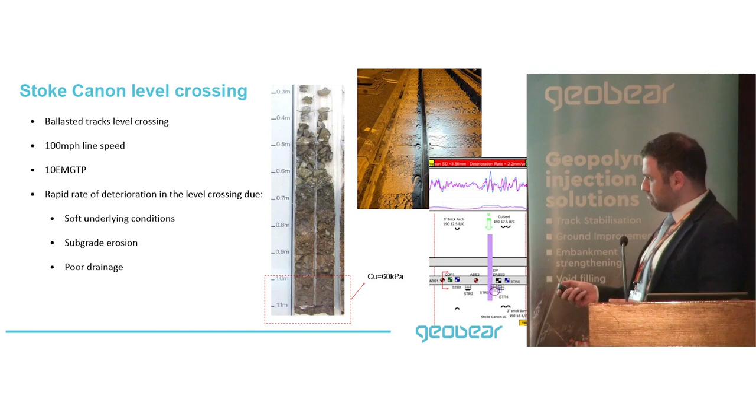They've got multiple problems going on: a soft underlying condition with relatively soft clay below the ballast, and due to dynamic action and poor drainage, they also ended up with subgrade erosion problems. Some of the clay particles started pumping upward through the ballast, contaminating it, and you can see some wet beds developing there.

Quite harsh track quality, very high rate of deterioration, and we were called up to stabilize this as a temporary solution. So far we've completed the down line, and we're supposed to complete the up line.

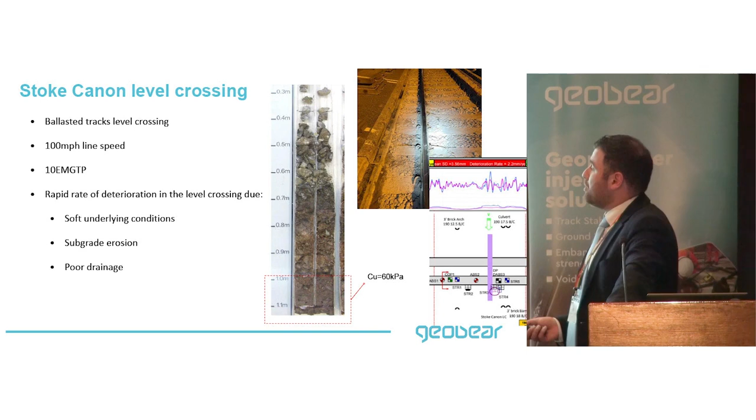What we've done is injected right below the sleepers at a depth of 1.3 meters, and extended the treatment about 2 meters each side of the level crossing to create a transition zone, injecting a very heavy-duty, high-density geopolymer. One of the main objectives was that we should not create any track heave or lift, so we had very rigorous monitoring to make sure that didn't happen.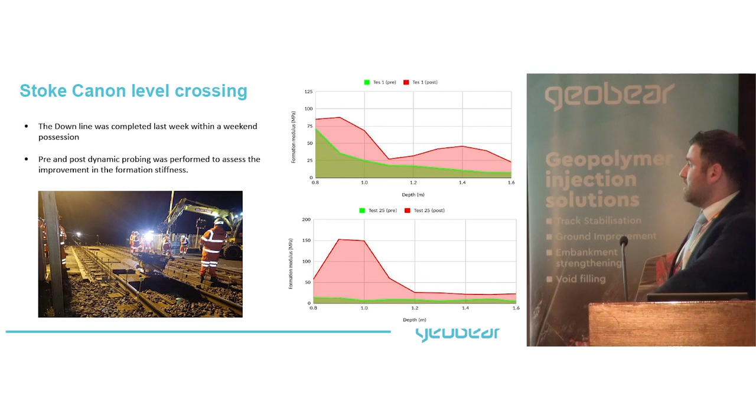Another example is from Ilford Rail Depot. They had a railway depot where they wanted to increase the bearing capacity of the foundations. What they had was about 19 footing pad foundations, 3 by 3, and 168 meters of strip foundations, with a combination of different clay and sandy soils, and they wanted to increase the bearing capacity to 350 kPa, so quite a substantial increase or high requirement.

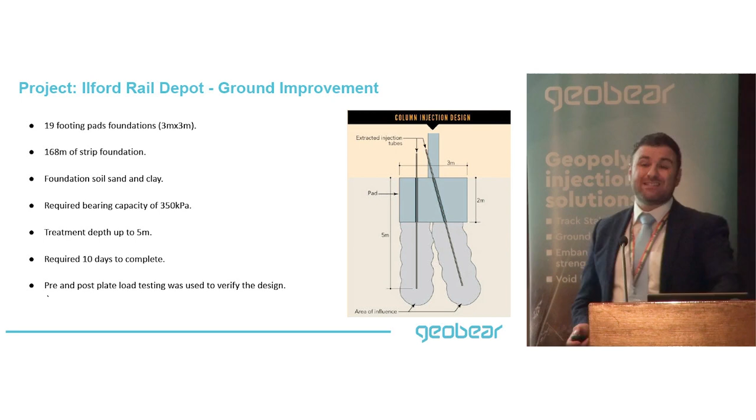So we determined that we needed to treat about 5 meters below the foundations, and we had to finish the work within 10 days, and we had to do pre and post plate load testing. So there was proper plate load testing involved in this.

So quite a success, and probably what we've done, we've overdone it in this case, and we've overachieved the design targets. Another example where you might see a lot on social media, with quite a lot of information online, is the Shugborough tunnel.

On that particular tunnel, we were tasked to basically fill up voids that develop behind the tunnel lining. These voids sometimes tend to develop as a result of water ingress, and believe it or not, some of them were up to 700 mil in depth behind the tunnel lining. So that's the first objective.

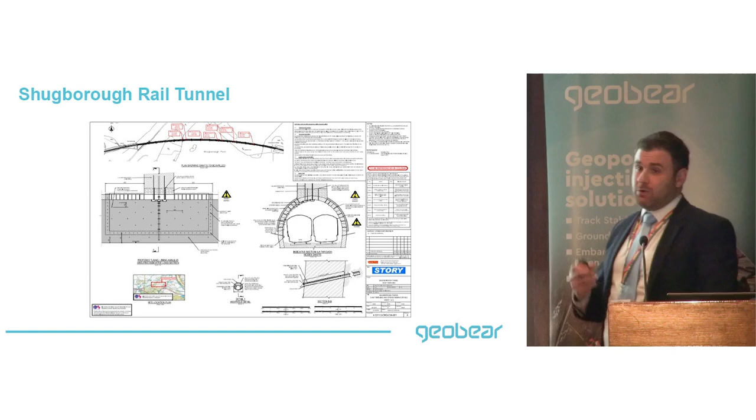So what we've done on this particular scheme is we basically used a high density geopolymer, very strong, but at the same time quite light compared to what you would get from conventional grouting. We basically drilled every meter center in a staggered pattern and injected the geopolymer.

What we've done to ensure that we fill everything properly is inject in one location and observe how the polymer will migrate to adjacent locations, just to make sure that we fill that space, making sure that adjacent holes act like a release valve, so you don't build up any extra pressure behind the tunnel lining.

The advantage in this approach is that you're not really adding any extra dead loading. If you wanted to use grouting in this scenario, grout has probably 10 or 20 times more the weight of the polymer that we use, so you're going to be imposing extra dead loading on the tunnel lining.

And obviously, you're going to have an issue with flowability because you're going to have to create bulkheads to contain the grout. With this approach, you tend to get rid of all this problem, and you don't need a bulkhead or any of that, and you will get almost an instantaneous solidification, reaching almost your full strength within 6 to 8 hours.

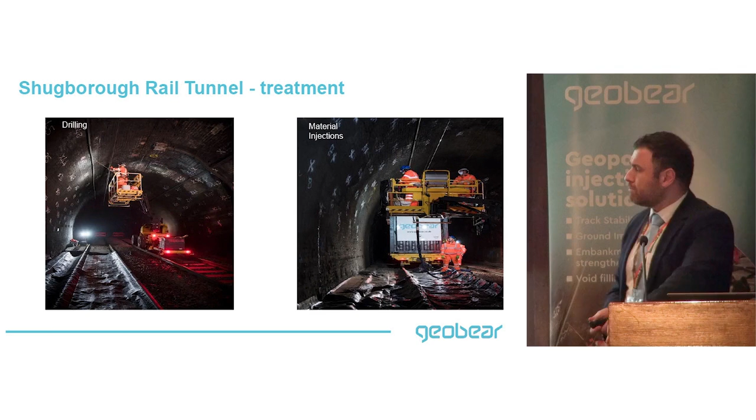So that was the void filling from the inside, and for the tunnel shafts, we injected a portion of it from inside the tunnel, but the second portion we basically injected from the outside via a geotechnical rig. We had an inclined drilling going through the ground to the tunnel shaft, injecting the remaining part to completely seal it.

Other applications - we've got numerous examples to go through, but I won't take up too much of your time. I've already given quite a lot of examples, but from what you've seen, we do a lot of slab track instability and geometry treatment. We also work on transition zones, creating them in situ without taking the track out. We treat sinkholes, since geopolymers are quite an ideal material for this. If you've got foundation issues, you want to stabilize the foundation or even re-level it, you can do that. Void filling behind tunnel lining and shafts - you've seen a nice example of that.

Stations - sometimes we've got a few schemes where structures within the stations are experiencing subsidence, so we treat that as well. If there's platform voiding, we can fill that. Water sealing, we can also do that.

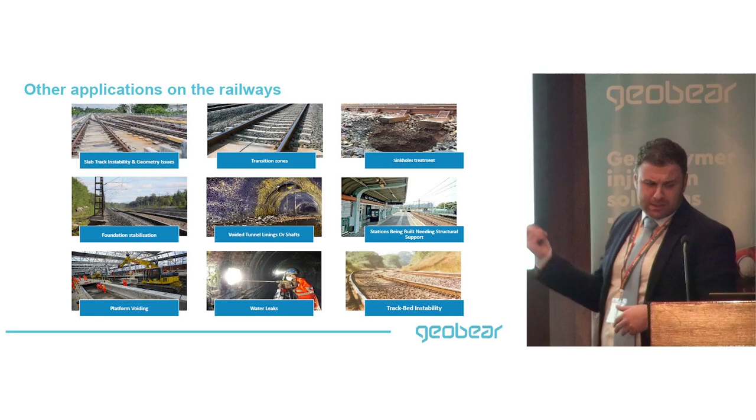And track bed instability treatment, I think we've done that and shown you an example. We've just finished testing at the University of Nottingham, testing our track bed solution there, so quite interesting and encouraging results coming out. Hopefully we'll be able to share it in due course.

And finally, I'm just going to conclude with 2 short videos from schemes, not from the railways, slightly different. Then we can conclude the presentation and go to the questions section. First video is from the M11 scheme.

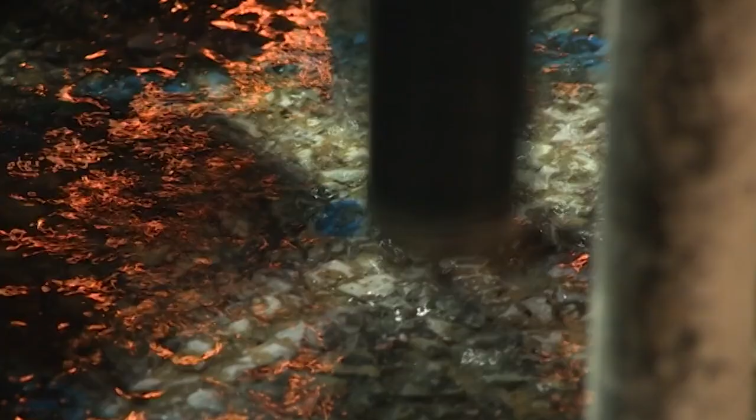On that one, we were tasked to do a void filling - drilling deep beneath the M11. It's midnight and this work has been taking place every night at junction 14. This is a new technique to reinforce roads suffering from erosion.

Rather than rebuilding it from scratch, they are injecting a special geopolymer underneath the surface that expands and then hardens in a matter of minutes.

In this job, I think we have pumped about 1,000 kilos or so, and the cavities haven't been so far as big as we had anticipated, although I have just been informed that we have found some quite sizable cavities right now, so we expect to inject more material tonight. This Ghostbuster-style slime is afraid of no voids.

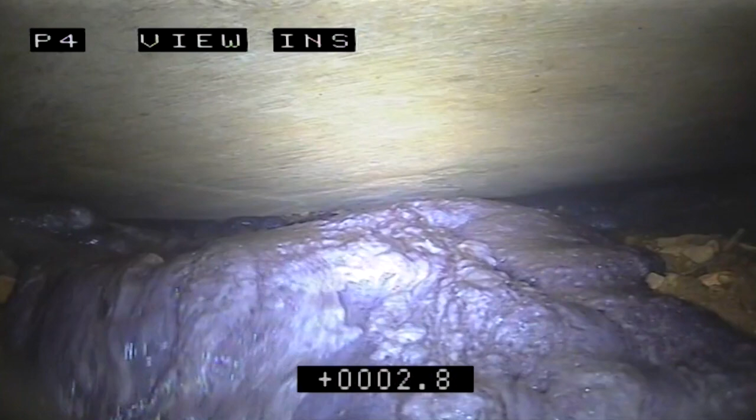It's even used to stop building subsidence. Last night they found some gaps nearly a metre deep. All there is between the actual road pavement construction and the ground is a large air void. If a lorry or something were to park on that particular area for any length of time, there's the potential for catastrophic failure. What, it would collapse? It would potentially collapse, yes.

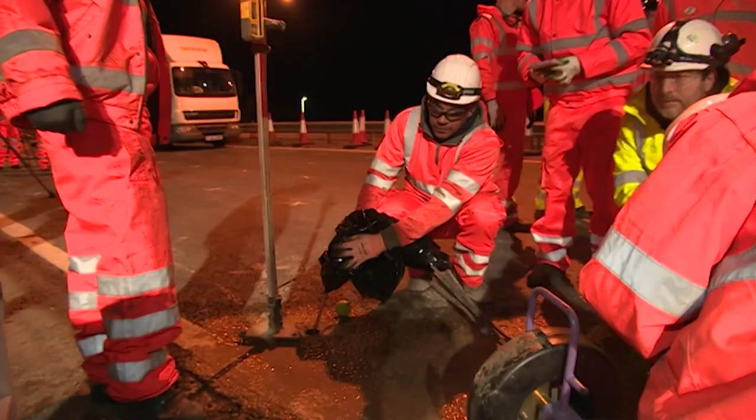Motorists heading north on the M11 cannot currently come off the A14 heading east. They have to head to the next exit and come back round. Traditional rebuilding techniques would have used tens of thousands of tonnes of material and closed the road for months. We are providing about 3 times faster void filling method than it would be if they did the mass excavation that was done on the other side.

We're very pleased with this technique that we've got on this side. It's going to take us about 3 weeks. On the other side of the road, where we did a more traditional technique, it took about 8 weeks, so the effect on the commuters has been reduced significantly. Well, this work will be continuing for the next 2 weeks at night, and then this part of the road will reopen like the rest of the M11 and A14 by October the 13th. Simon Dedman, BBC Look East, the Girton Interchange.

And one final example from a sewage stabilisation solution, where they had a flash flooding that affected and undermined a sewage system or a sewage junction near a pumping station. Underneath this road there was a complex sewage system that was undermined as a result of flash flooding, and it started settling, creating all sorts of cracks into the pipe works here, as you can see from this BIM model.

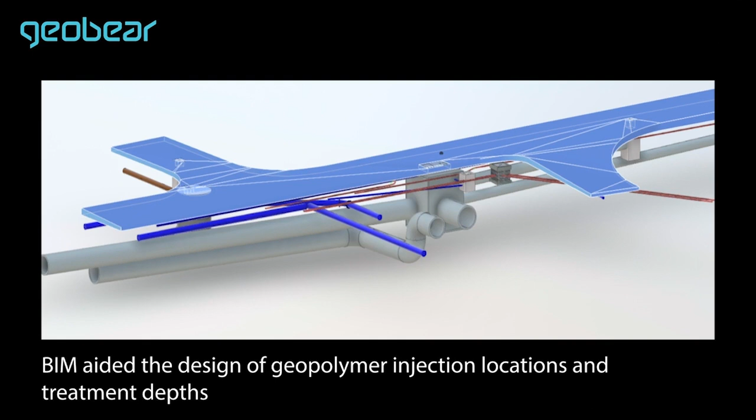We basically carried out a treatment and worked with the client to develop a BIM model and added our injections to it just to make sure we don't create any clashing. We basically injected our geopolymer, large quantities of it, underneath the pipes to strengthen the ground below it.

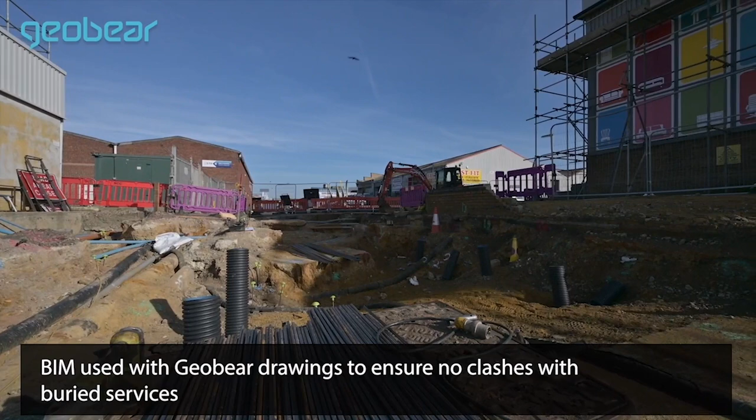It's worth noting they had super loose silt sand there, so quite a soft subgrade as a result of the washout and the erosion that resulted from the flash flooding.

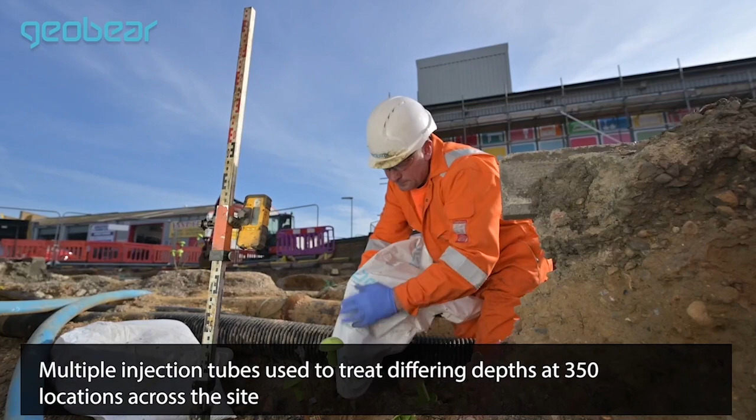On that particular scheme, we had to surgically place every injection via a very accurate GPS system just to make sure that we don't hit any service or any pipe. Quite an extensive scheme, and we had a remit to work with a certain SPT blow count that we had to achieve.

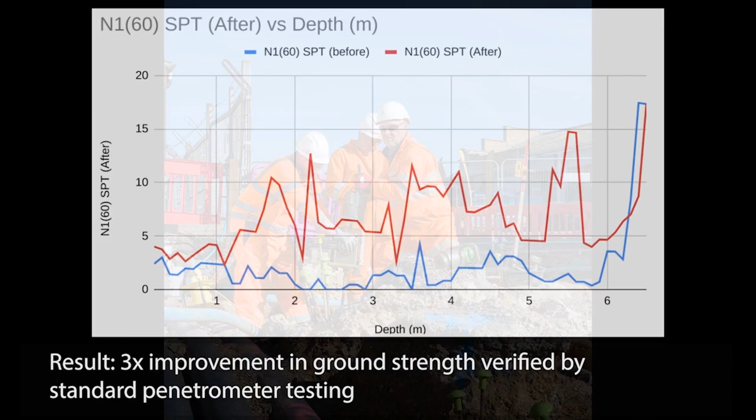So we carried out before and after SPT testing, where the blue curve shows the SPT before the treatment and the red curve shows the SPT following the treatment - roughly about 3 times improvement in the SPT. We were having SPT blow counts of almost zero, and at some depths we managed to actually stabilize this substantially.

And I think that's the conclusion of this presentation. I hope you found it interesting and you've enjoyed it. And please, if you've got any questions, do not hesitate to ask us.